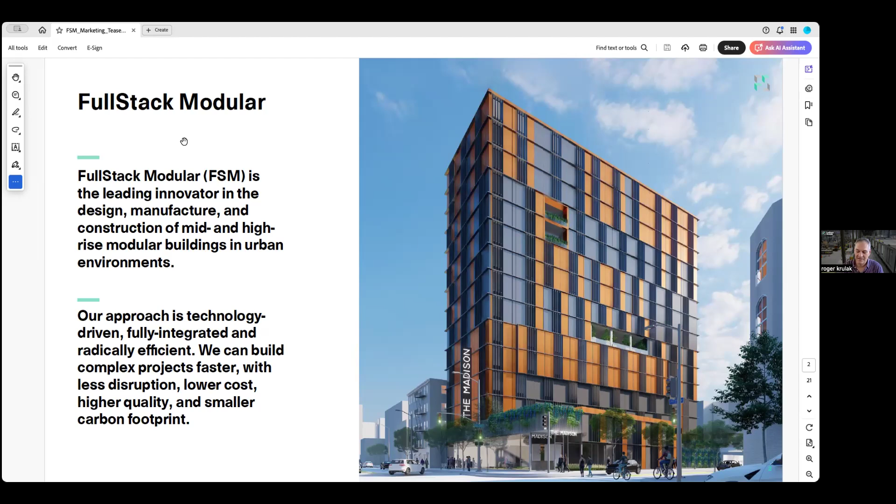Our system and our process is fully integrated from design through industrialized manufacturing and construction. We, as a system and process, almost always work with local architects to integrate the process of our system into the development process. And frankly, it really only works one way, which is basically design build. I don't know any other way to define it.

This is sort of our executive team. Lots of development experience, known each other for a long time, and we understand construction, development, and design pretty well.

This is FullStack's core, frankly, modular proposition, which is lower building costs, faster development, safer work conditions, greater time and cost certainty. We'll talk about that a little bit. Very little neighborhood disruption. Our mods are fully finished and they have a facade on when they go to site. So all the work and all the workers happen within the building for the remaining stitched-together work that has to happen.

And then the fact that we are in an industrial space allows us to be very effective. And as a result of that, we have significantly less waste than a conventional process. It all also happens under a roof, which I know it never rains in Oregon, but not having to worry about that is a big advantage.

I also know that the neighborhood is very focused on sustainability, so the mods are very tight, the systems are very tight, the operational carbon reduction is all based on things that you pretty much all understand. The thing that's worth noting is that the system that we use is also very friendly to all of the elements that reduce operational carbon. It's really easy. You have a very tight envelope.

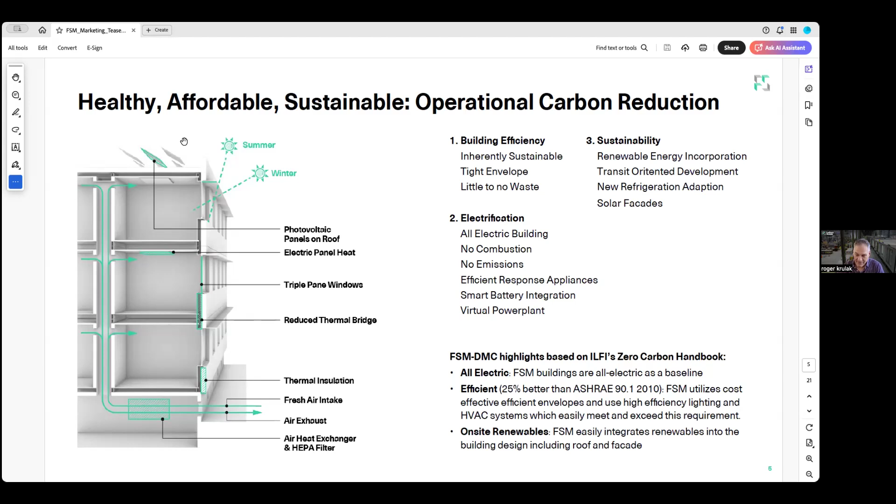And then embodied carbon, pretty much the same thing. And I know I'm talking to people in Oregon, but I'm going to tell you that steel is pretty darn sustainable, and it's almost all recycled, although it doesn't have the carbon footprint of wood. It's still very, very reused, and very little heat is used to reshape HSS members, which is what almost all of our system is, HSS members with light to medium gauge steel infill.

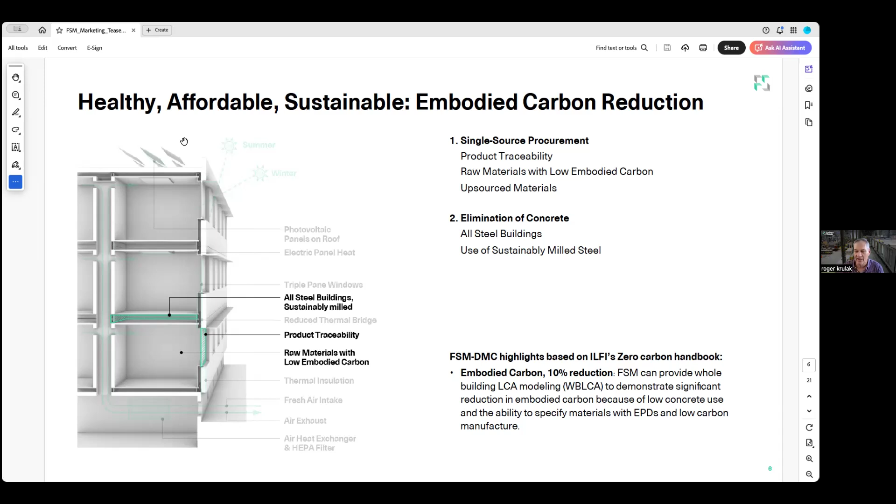And then interestingly, if you're building in a factory, excuse my cough, for industrialization, you have complete control over what you're using in the building. We buy everything because we're all one system, one trade, et cetera. We can incorporate highly sustainable products within the system without much problem.

And this tends to be one of my favorite slides because it does explain the difference between what we do and sort of the conventional process with a very little bit of snark, but it's true. Anyway, traditional process, we all know this, you go into design, you bid it to some general contractor, you get preliminary cost estimates. It's all too expensive, value engineer it, revise the bid, et cetera. Then you build it, and then you figure out what the final cost is at the end.

The difference between that and integrating it into a design build, or what we call design manufacture construct, or I like to say run DMC, is that because in a factory, all we have is material, labor, and overhead, it is easy to quantify the associated costs and the remaining work with what we do. And as a result of it, you can get preliminary costs very, very quickly, and you can literally get final costs established, including the on-site work, before you start manufacturing.

So your commitment for actual costs ends up happening much more rapidly, as long as you can put your pencils down and pay attention to the fact that everything's going to be built immediately and you can't choose your tile or paint colors later. It will go much more quickly and be cost effective very quickly. And as a result of that, between the on-site work and the manufacturing in the factory, you get some time savings out of the box.

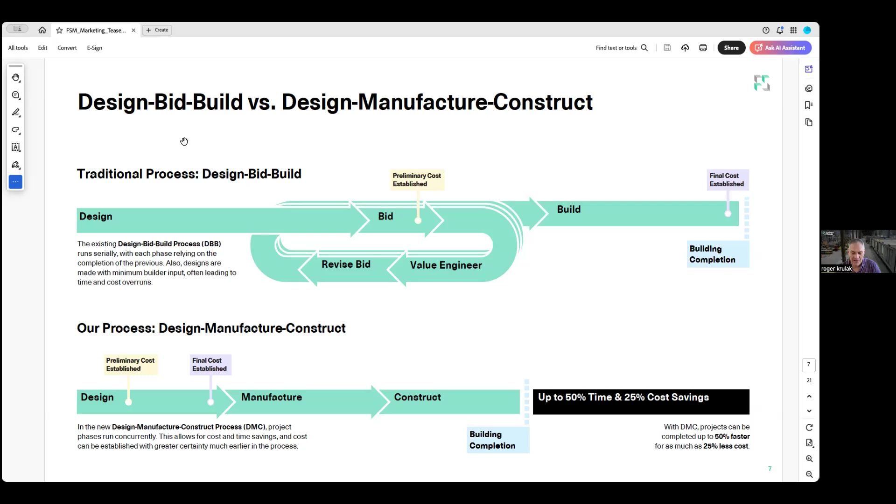And then the more you repeat the DfMA process for a building type or a product type, which doesn't have to be identical looking buildings, but similar product, you can decrease the design costs over time. And right now, we're working on a project in California for Cal Poly San Luis Obispo. It's 8 buildings, we are on the 2nd building, and we're already seeing significant design cost savings, and also unit cost savings as a result of the repetition of the process.

This is our production. So as I was describing, our system isn't productized to the level that you choose from a catalog of what kind of mods you want.

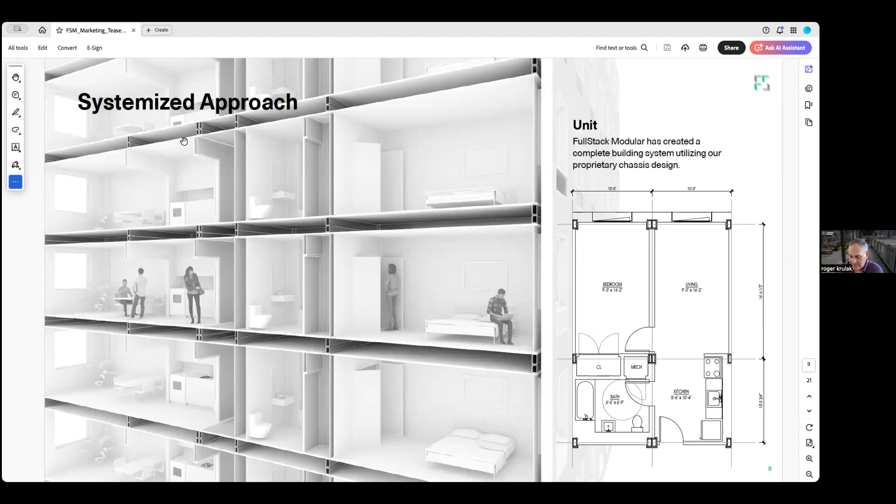Although if you want to do that, we're happy to make it happen. But what we do is we figure out a way to create flexible components that elements can be repeated as much as possible. So, for example, we come up with the maximum amount of bathroom designs that we need in order to meet the market, and then we're going to try to shrink those to as few as possible.

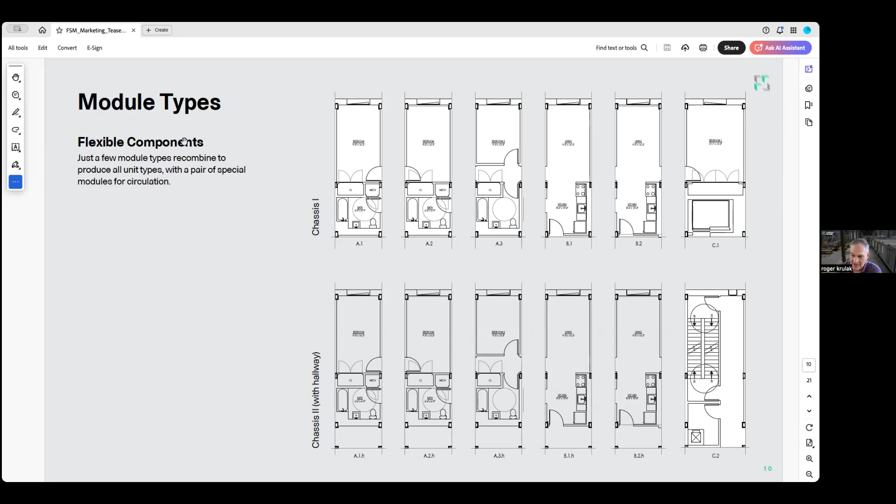The same thing with kitchen layouts, as few as possible. Doesn't mean you can't have variety, but you want as little variety as you can live with to meet the market need. So, yeah, happy to answer those questions in a little bit.

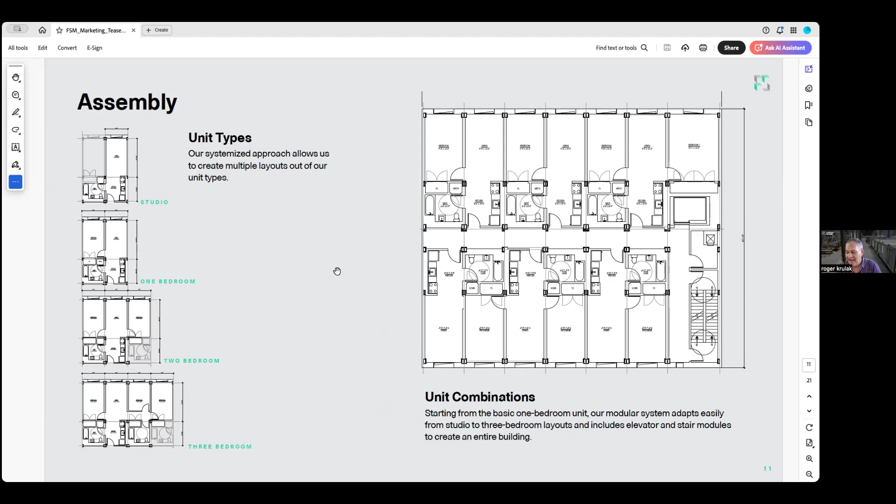All right, so the idea is, as you can see, we've taken the elements that we showed in the previous thing, and we've organized them into 1, 2, and 3 bedroom units, but they're still using the same elements, the same chassis, et cetera. And that is what increases speed, and as a result, decreases price.

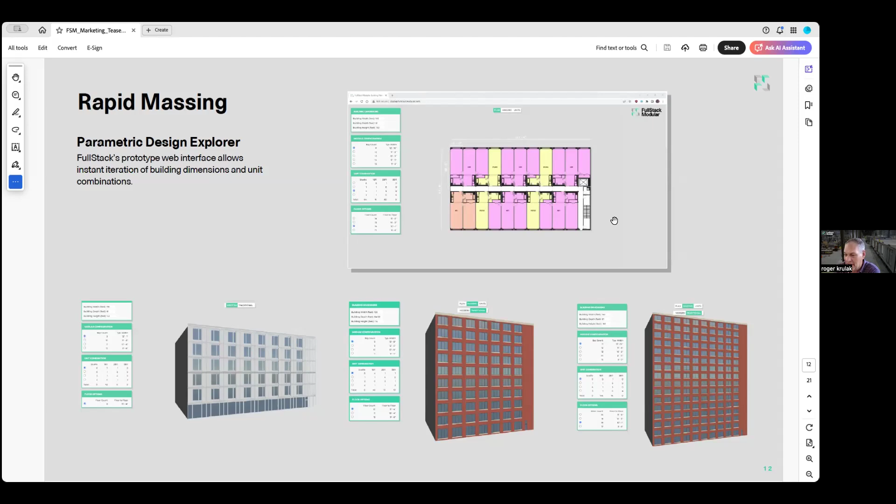So we're actually working on redoing this, but you can go onto our website, FullStackModular.com, and go into try the design, and then you can mass out a few buildings yourself, and it gives you unit options for the massing and lets you put a couple of facades on it, just to think about the way we think about the parametric design process.

And I think more importantly, for developers and architects and engineers, the one thing that we do is something that's very similar to what in the UK they call quantity surveying, but we really build the building from an estimating perspective. We build the building from the inside out.

And what that means is that we're taking all of the elements that go into the building, and we create what we call subassemblies, which are subcomponents of the building system that creates the building. And then those subassemblies go into the units, and those units go into the ability to rapidly prototype different size buildings using the same components, using the same elements, et cetera.

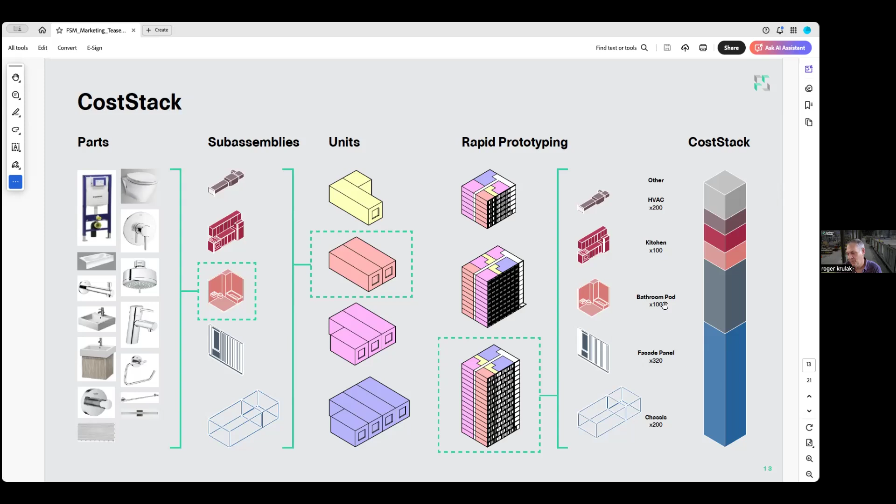It gets rapidly requantified, and then what it puts out is a cost stack, and the cost stack tells you where you're spending your money. And that way, when you get your final cost, you can actually see what is driving the cost and what the opportunities are associated with. So

I said the word subassemblies, so now I'm going to explain it. So in industrialization, certainly for the built environment, and for almost all other industrialized construction, we organize our construction by assemblies and subassemblies. So the assemblies are putting everything together, and the subassemblies are things like facade, bathrooms, kitchens, flooring subassemblies, mechanical subassemblies, et cetera.

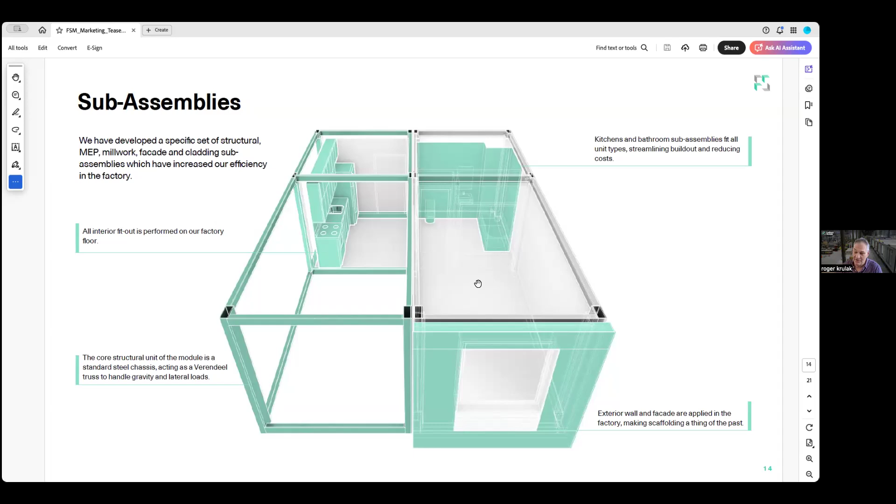And what we try to do in the factory is we organize the assembly of all of those subassemblies and components in the most efficient way possible. So at FullStack, although we are signatory with the building trades, the workers in the factory have no jurisdictional separation, so they can do anything they can do well, wherever and whenever the labor is needed. And that makes the ability to take advantage of the process efficiency of building.

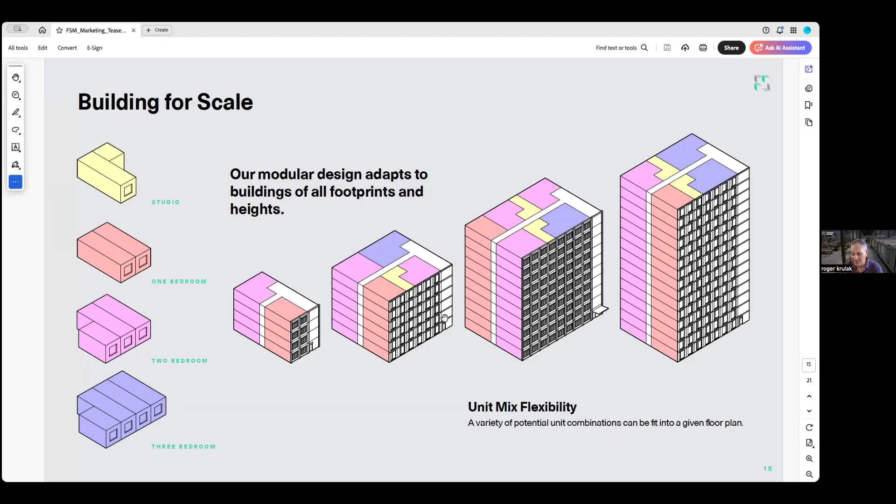And then once you have those optimized units for the market that you're talking about and the need that you're talking about, you can put it into a small building or a large building or a different shaped building. It doesn't really matter. It's really building blocks, literally building blocks for the system and the process.

The other thing worth noting is that it is a fully integrated system. It's SMEP plus facades, so structural, mechanical, electrical, plumbing, and facades. It's all one thing. It all goes together. It all has the same tolerances. It all has the same system.

It's built absolutely to theoretical, which means that what's on the drawing actually gets manifested in the building, because in a factory, you're not on site. You can only build to theoretical. And so it has to match when you get it on site.

Some of the advantages that we have here is that we have this structural system, which can go up to 45 stories in a non-high seismic area, and up to 28 or more in a high seismic area like California or certain parts of Oregon. We have a self-sealing facade system, which we use for many of our buildings, but not all of them.

And then it's a fully integrated solution. We can work with a general contractor, or we could provide a turnkey solution. It doesn't matter that much to us.

It is, as they described, built-in sustainable. It's not an effort to say, let's add sustainability. It is by itself sustainable. And then the other thing that's different about what we do is we do full interior fit out. Everything's completely finished. All of the kits to connect it are provided and shipped in the mods.

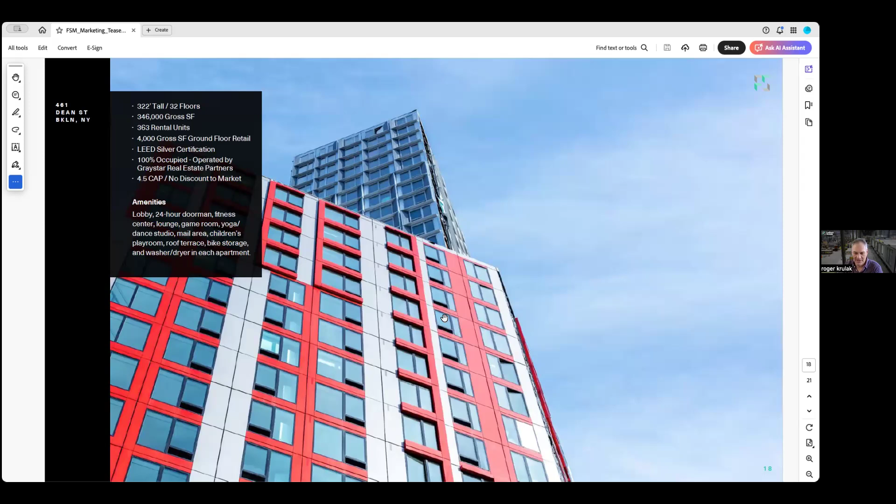And this, of course, is the tallest modular building in North America, not in the world anymore, although at one time it was. This is a project that we're working on in California. This is a project that is permitted in LA, for homeless housing actually, and hopefully it will get built pretty soon, although it's permitted. And now, as I said, we're working on a project for Cal Poly, which is about 6 years of work and 9 buildings.

And I know you had a bunch of questions. Thank you, Roger. I'll try to kind of relay. There's a bunch of questions that have come in. I'll just start feeding them to you. David asked, what are the design constraints of the DfMA process in terms of materials, articulation, facade choices? Boy, I'll bet that's an architect. Anyway,

so there's lots of flexibility. The parameters are basically based on transportation, sort of high costs, and a desire to minimize the variation to the extent possible. And beyond that, there's a lot of flexibility. So you can change the ceiling heights, you can change the mod widths, you can change the mod lengths based on standard code, et cetera.

And facades are basically somewhere between a rain screen and a curtain wall. So it's attached, so you can pretty much attach anything you want to it. Windows, any kind of finishes you really want, and then obviously you can articulate that. Let me see if I can pull up something here. This is the project we're working on right now, if I can pull it up.

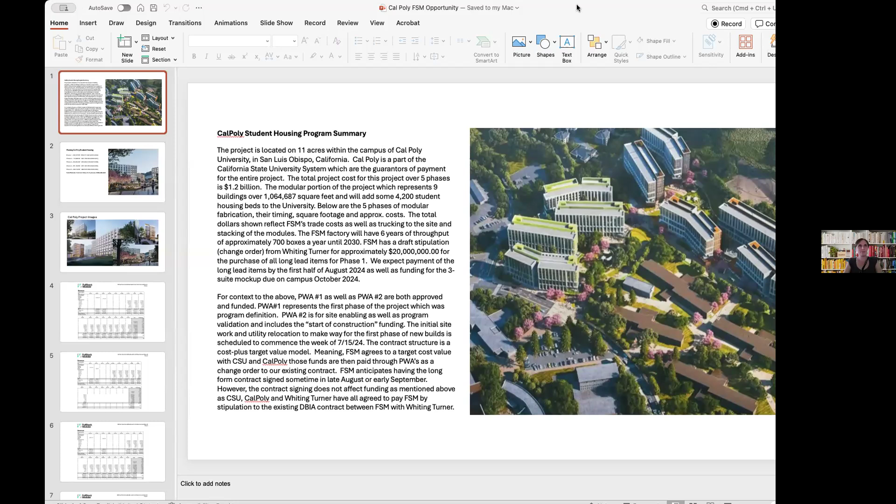Let's see if it'll come up. Let me see if I'm sharing still, right? Am I sharing? Yeah, we see your black screen with the contact. Okay. So just very quickly, this is a design from Steinberg Hart. Oh, sorry, Roger, we're seeing the last slide. All right, let me try one more time. Share. No. Let's see if it'll work. Okay, let me try one more time. Share. Okay, we see that. All right, great.

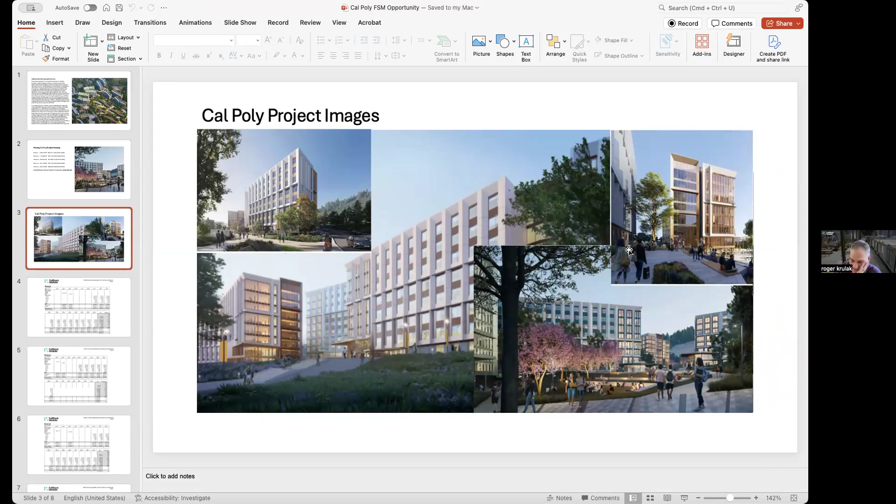So this is designed by Steinberg Hart. This is the Cal Poly project we're working on right now. These are modular buildings using our system, as an example. Wow. That blends well into the next question, which is, what's your typical project type: dorm, market rate, residential? If you could characterize who you're working for, what you're usually building.

Yeah, great question. So it's all type 1. We use no concrete. It's all steel, cementitious board. So we really tend to excel above anything that can't be built out of traditional wood, sort of 7 floors and up, although there are exceptions to that. If you don't want it to burn, it's pretty good, and obviously it's got some value. And the markets that we work in are hospitality, student housing, some mixed affordable housing, market rate.

It's generally in the elements that create unitary things that are generally not wider than 14 feet, as in the majority. Doesn't mean you can't have units that are, but that is one of the drivers. It's a tool where we ask you to share agency with our parameters, and then you have lots of flexibility.

Awesome. All right, we got a bunch more.

Jamie's curious, how do your timelines account for the permitting process and just local design guidelines and all that? You're obviously spanning a lot of different jurisdictions and counties and states. It's so good. A super good question.